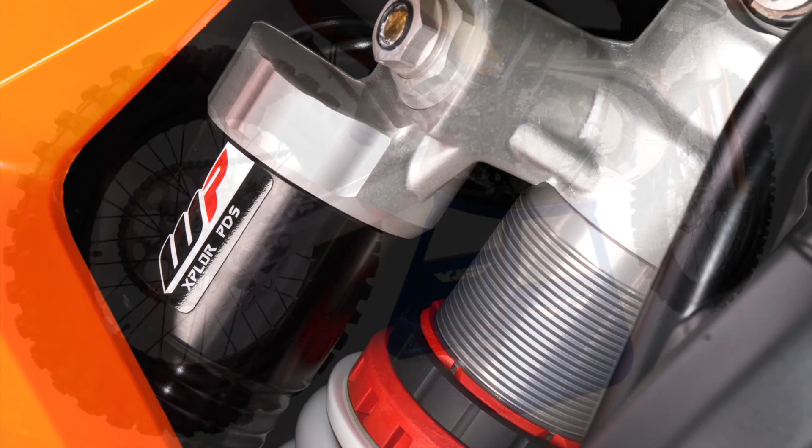This video is about the 2017 KTM XC-W line, and in particular, a review of the new Xplor suspension. If you're familiar with past XC-Ws, you won't have trouble adapting to the new one. It retains most of the characteristics of the trail-oriented wide-ratio transmission KTMs we're accustomed to.

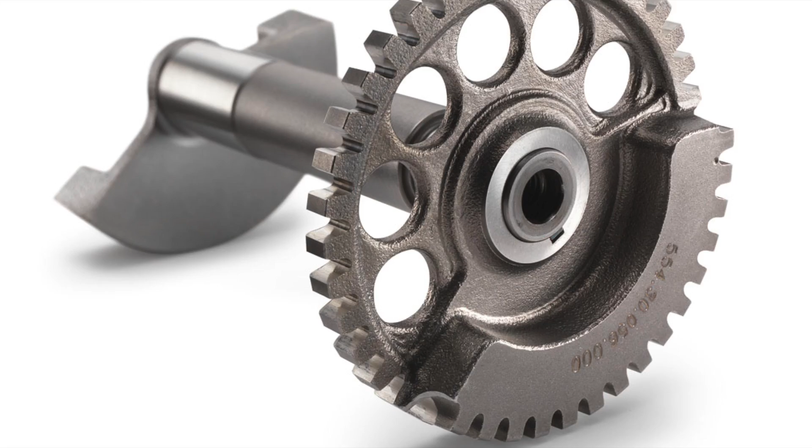The most significant improvement by far is the new engine counterbalancer. The motor is as powerful and responsive as ever, but has much less vibration than previous years. In terms of ergonomics, I was completely at home with the new frame and cockpit layout. It's comfortable and narrow between the knees, and the bike has a nice lightweight feel.

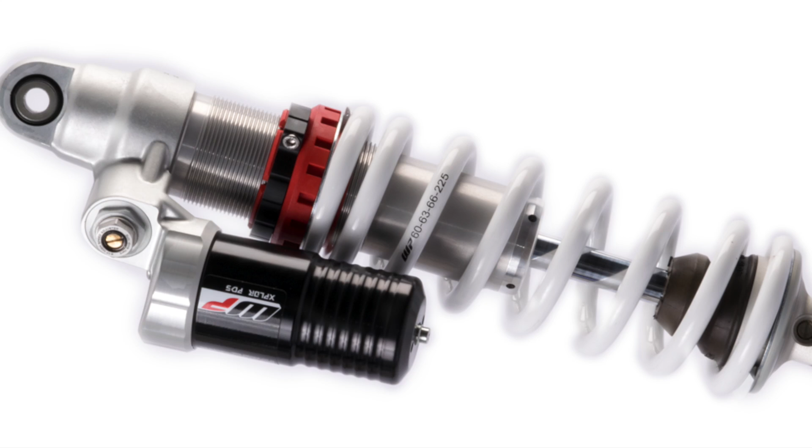From a tuner's perspective, the Xplor suspension looks like a cost-cutting measure for KTM. The new shock body was downsized from 50mm to 46mm, which reduces fluid volume and could contribute to heat buildup and fade. The fork is very similar to the previous generation open cartridge fork, the major difference being the split compression and rebound adjustment.

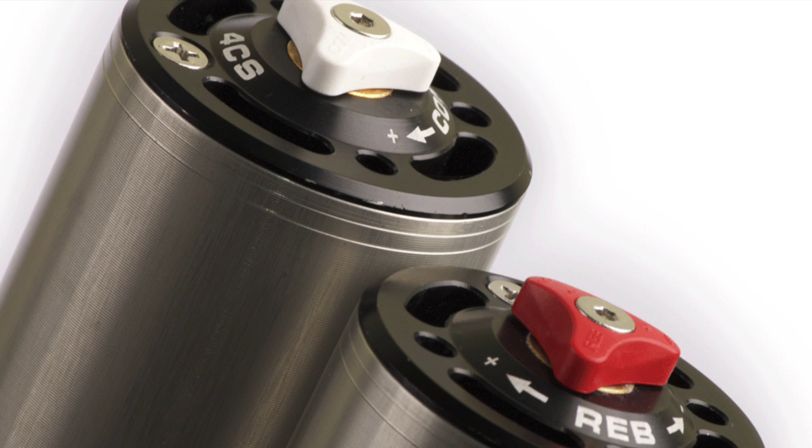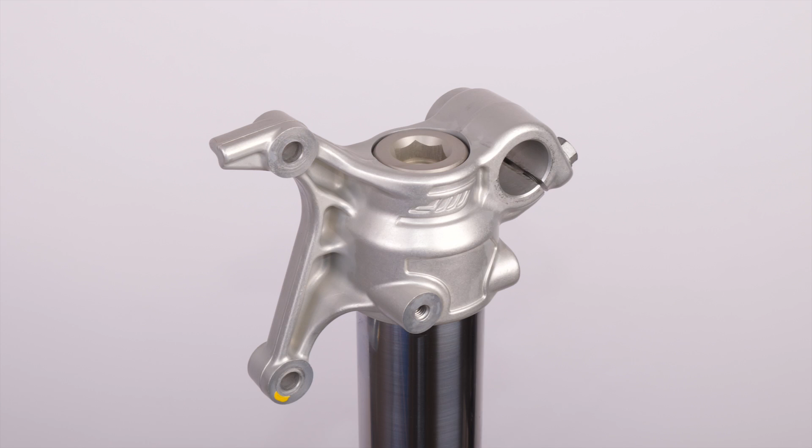Xplor has a single rebound adjuster on top of the right fork and a single compression adjuster on top of the left fork, just like WP used on the more or less universally hated 4CS fork. KTM's marketing department argues that this setup makes the adjusters more accessible and more convenient to the rider. However, I think every engineer at WP knows the real motivation was to eliminate two expensive compression adjuster mechanisms from the bottom of the fork.

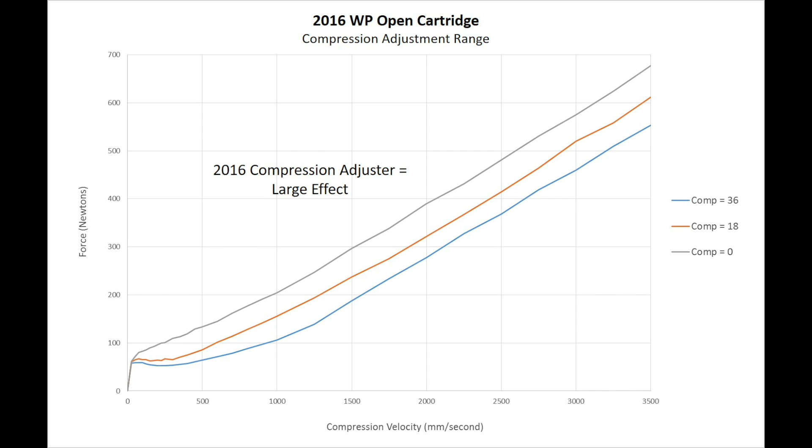Dyno testing at our facility shows what the compression adjuster on the Xplor fork actually does. The first chart shows the Xplor fork with the compression adjuster fully open, at the halfway point, and fully closed. In comparison, here's the adjustment range of the old open cartridge fork at the same three adjustment settings. As you can see, the Xplor compression adjuster has very little impact on compression stiffness.

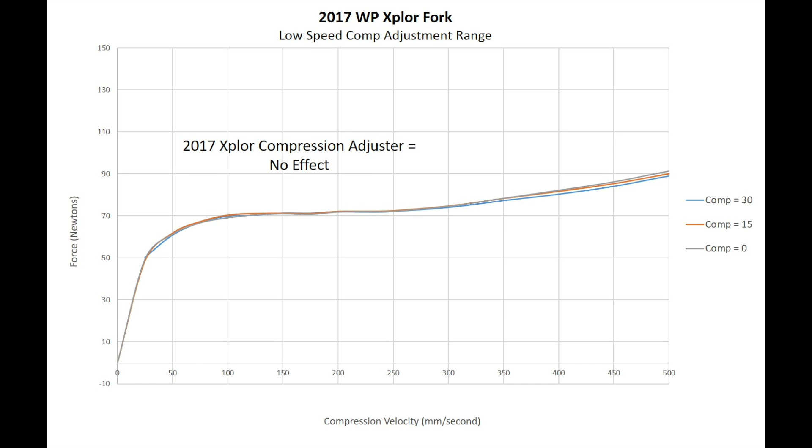Most important of all, the Xplor adjuster has no effect whatsoever in the low speed range, shown here from 0 to 500mm per second. Your suspension is constantly working in the low speed range, and being able to make adjustments here is critical. Making the adjuster more accessible doesn't help if the adjuster doesn't work properly.

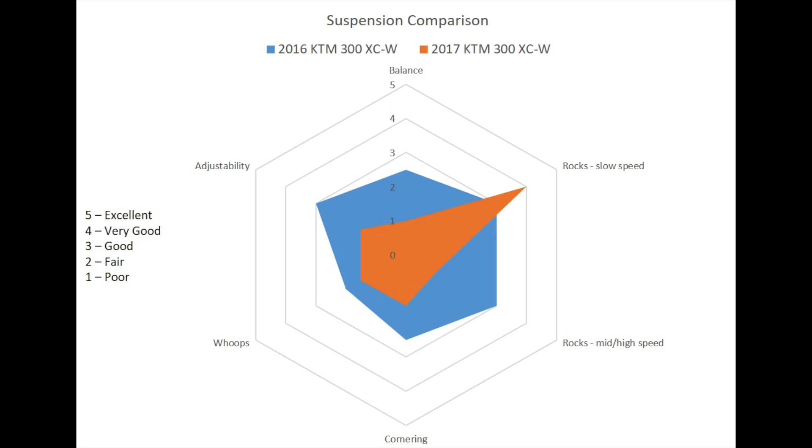This chart summarizes our impressions of the 2017 Xplor suspension compared to the 2016 XC-W suspension it replaces. As you can see, we gave the 2016 model, represented here in blue, higher marks overall. Balance. XC-Ws are typically set up a little softer in the front than the back, and that setup makes sense for some applications, but 2017 takes that imbalance to a whole new level.

The Xplor fork is softer than the model it replaced, and the shock is stiffer than the model it replaced. As a result, I found myself constantly hanging out over the back of the bike, trying to stabilize the chassis and reduce the effects of excessive fork dive.

Slow speed impacts. The upside to the super soft Xplor fork is that it offers good comfort in slow speed rock gardens. If you are new to the sport or spend most of your time riding very slow first gear terrain, you are much more likely to appreciate the stock fork performance. The cushy fork is somewhat offset by a shock that will occasionally deliver a sharp kick to the backside on square-edged obstacles.

Medium and high-speed impacts. Unfortunately, the Xplor fork's slow-speed compliance completely disappears as the speeds increase. Watch out for unseen rocks when clipping along in third gear, because the fork can feel completely solid on this type of obstacle.

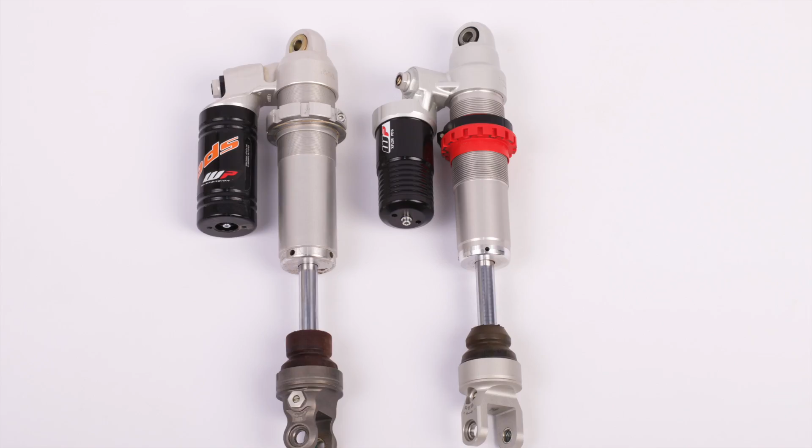Cornering. I gave the 2017 low marks in cornering for three reasons. First, the suspension setup is unbalanced to begin with. Second, the Xplor fork has the worst brake dive I've experienced in any modern performance-oriented dirt bike. Unfortunately, fork dive can't be reduced by adjusting the clicker due to the problems with WP's split adjuster system explained earlier. Finally, the Xplor PDS shock still has the same top-out tendency that we saw in previous generation PDS shocks.

Together, these factors cause a rapid and excessive weight transfer onto the front wheel when setting up for a corner. This can make the front end knife or tuck. Whoops! In the whoops, the chassis balance issue continues to haunt us. Supercross riders are known to run extremely stiff fork settings combined with relatively soft shock settings to keep the front end up and the bike tracking straight through the whoops.

The XC-W, with its bouncy fork and PDS kick in the back, is literally the opposite of this setup. The fork completely collapses on the face of every whoop, exaggerating the tendency of the shock to boot the back end of the bike up into the air.

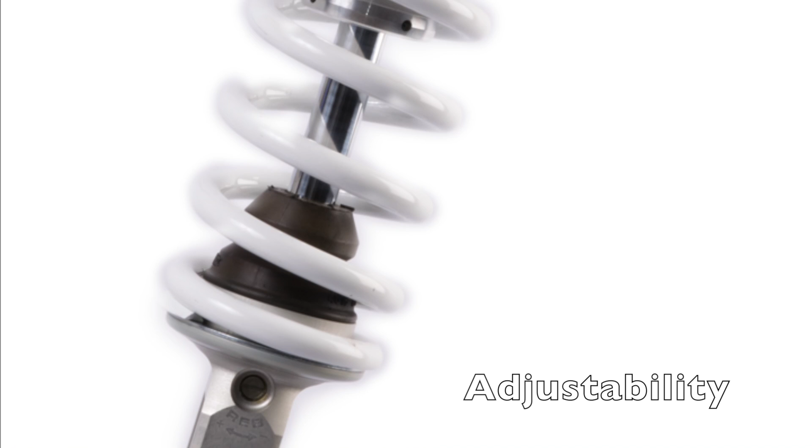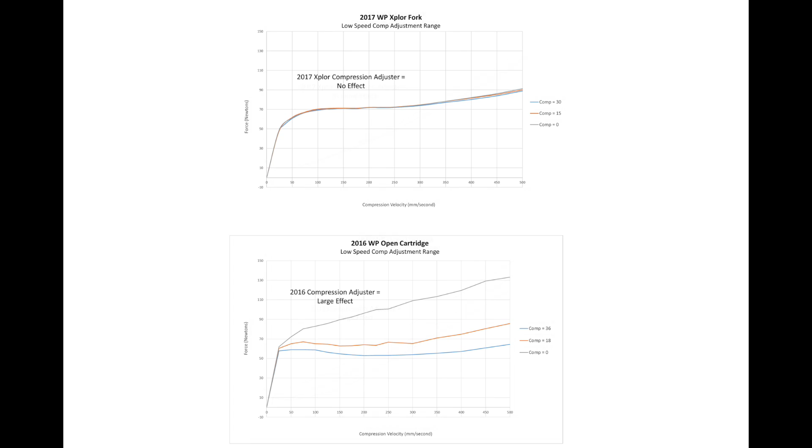Adjustability. Fortunately, the Xplor shock retains the same adjustment features as the previous PDS shock, with high-speed compression, low-speed compression, and rebound adjusters all working as they should. The Xplor fork with its split adjuster design is another matter. As we demonstrated earlier in the video, the fork has very little compression adjustment range and zero ability to adjust low-speed compression damping where we need it most.

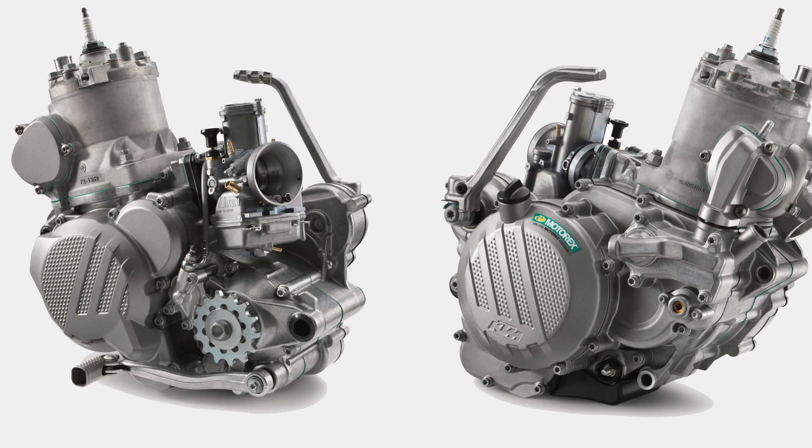In conclusion, the 2017 KTM 300 XC-W hit a home run with the new motor, but took some irritating shortcuts with the Xplor suspension. It's possible KTM is targeting the bike for beginners, but this is still an expensive, high-end dirt bike, and I think a lot of serious riders will continue to buy XC-Ws for the wide ratio transmission, linkless rear suspension, and the headlight.